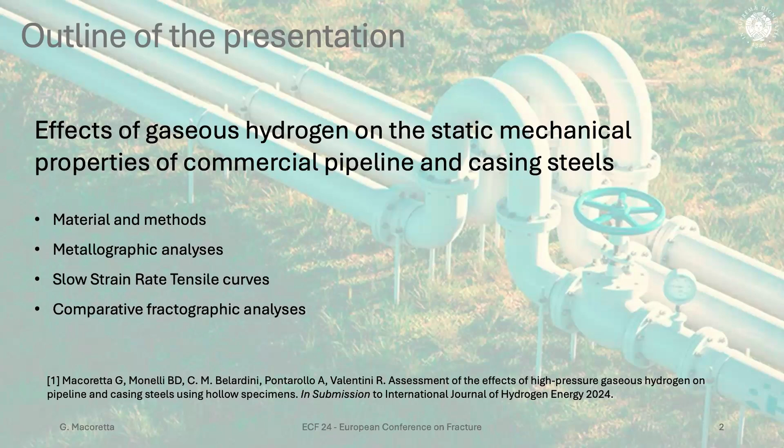We work with a hollow specimen, with an internal hole produced by drilling and, in this case, reaming, with a diameter of 3 millimeters. We introduce gaseous hydrogen into the specimen at a pressure of 10 megapascal, but we can reach even 20 megapascal. We use hydrogen with high purity, research grade purity.

The specimen presents a through hole because it's used for purging with hydrogen. So we have a pressure cycle before starting the test: at least 5 times we pressurize the specimen, release the pressure to at least 3 megapascal, and pressurize the specimen again, so we don't reach atmospheric pressure, to avoid the entrance of air. The specimen is pressurized at least 10 hours before testing because we want to be sure there are no gas leakages before the test, since the test itself is very slow.

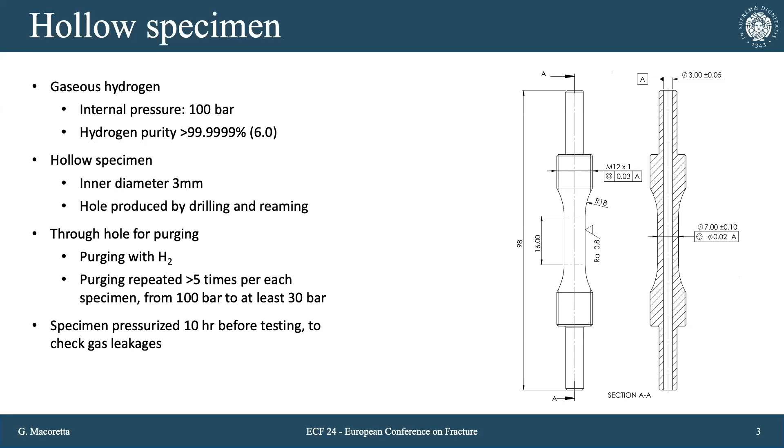This is the specimen. This slow strain rate tensile test is carried out in displacement control with a displacement of 0.1 micron per second, giving an effective average strain rate of 1 times 10 to the -6 per second. So it's a very slow tensile test.

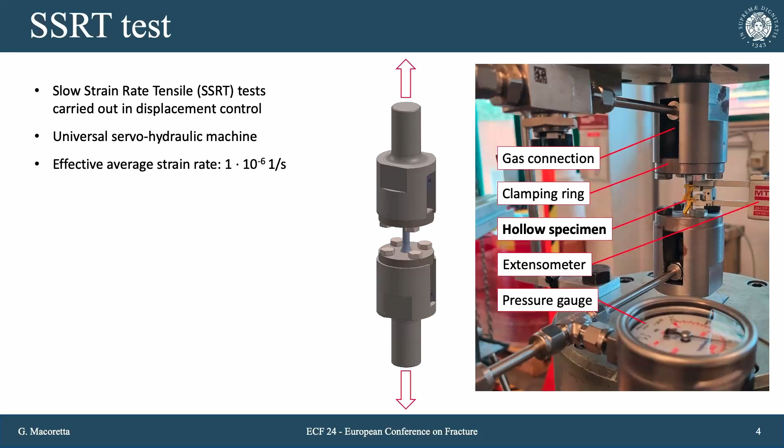Here you can see the test configuration. In the middle of the picture you can see the hollow specimen with an extensometer to monitor the deformation of the central portion of the specimen. You can see the clamping ring, a fixture that applies the load to the specimen, decoupling the load from the pressure fixture. We have the gas connection, and on it a pressure gauge to monitor the effective pressure in the specimen during the test.

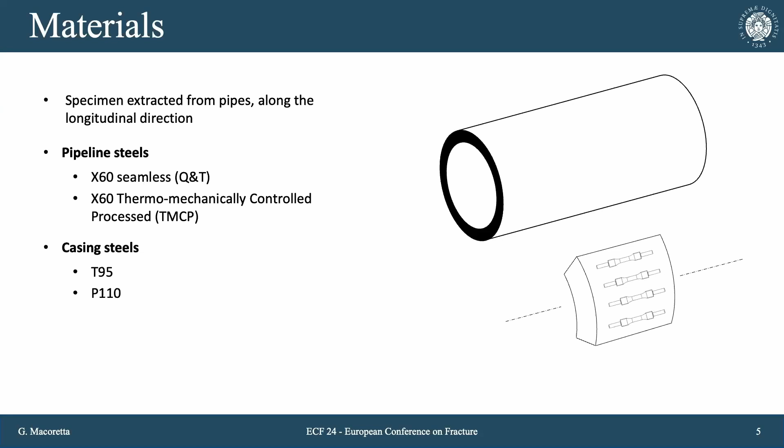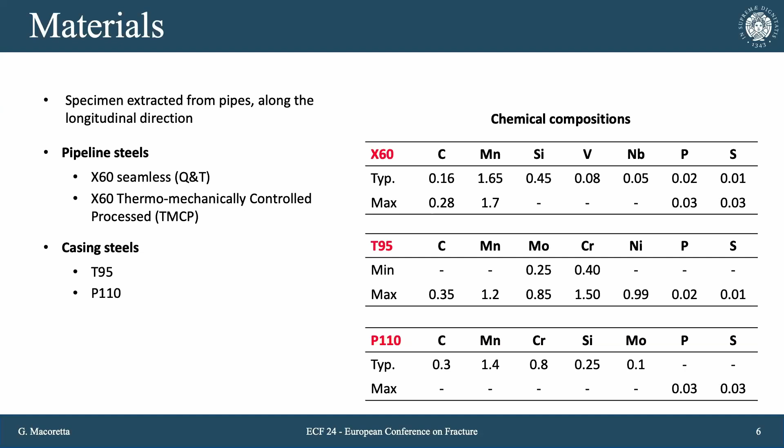Materials: we deal with X60 pipeline steel in the seamless configuration, so pipes produced via seamless process, and thermomechanically controlled processes materials, so a material produced by welding, by bending and welding sheet steel, and casing steel T95 and P110. All specimens were extracted from the pipe along the longitudinal direction, aligned with the pipeline longitudinal direction. About chemical composition, we are dealing with low carbon steels; in particular for the X60, but in all cases we have a carbon content lower than 0.3, more or less.

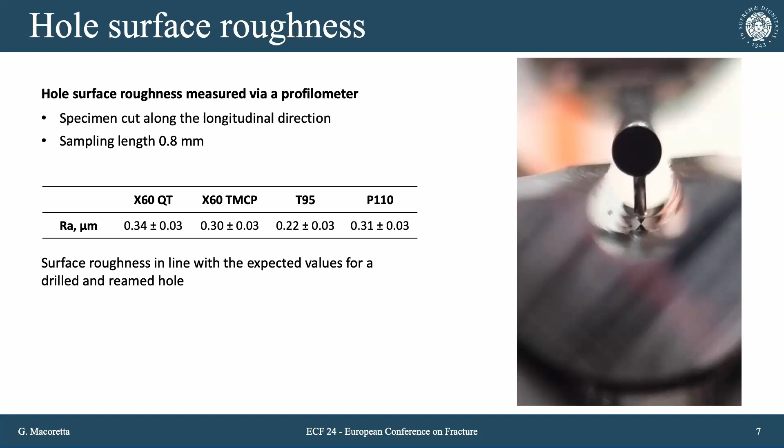Let's start with the assessment of the surface integrity of the hole. The hole, as I said before, was produced by drilling and reaming. We carried out surface roughness measurements on the internal hole of the specimen, and the results are in line with what we can expect from a reaming process. We have an average roughness value of 0.3 microns, in line with the reaming process.

If we also assess directly on the microstructure the effect of plastic deformation produced by the drilling and reaming process on the material, we can see that the drilling process affected a thickness of about 20 to 25 microns, both in case of the X60 TMCP or X60 quench and tempered material. You can see the difference is more evident in the first one, because of the more ferrite grains.

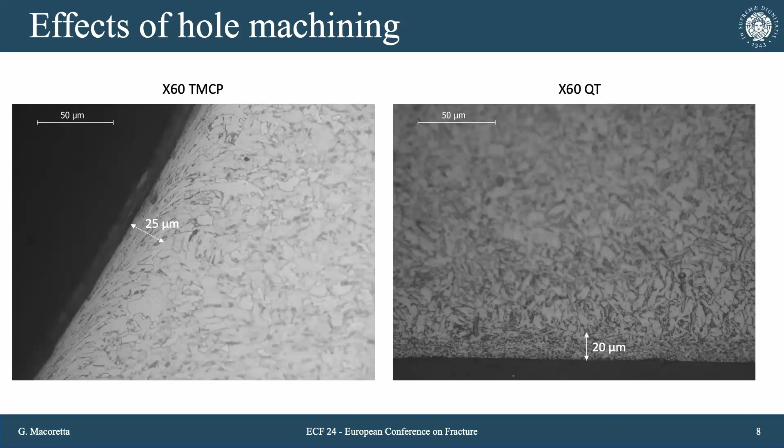Let's start with pipeline steels, and the microstructure of the material. Both materials are defect-free; it's a standard defect-free material used in the hydrogen, oil and gas industry.

If we look at the microstructure for the quench and tempered material, we can see the standard acicular ferrite typical from the quenching process of the low carbon steel, while in the TMCP material that was produced by submerged arc welding and then a homogenization process, we can see more ferrite grains with some pearlite islands.

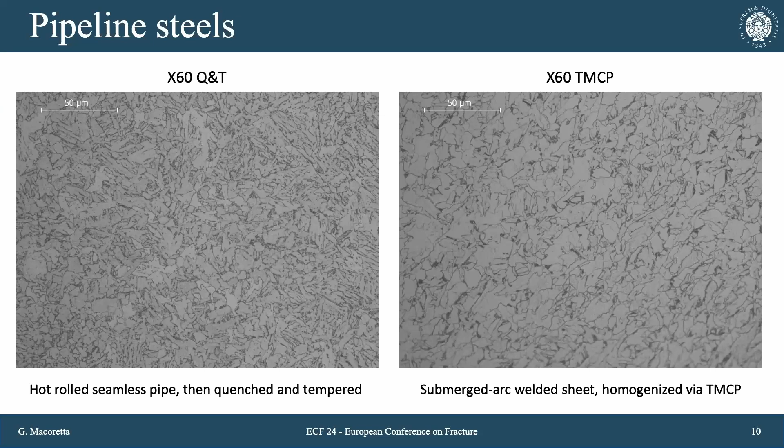If we look at the results of the slow strain rate tensile test, we can see the effect of hydrogen. Here we show the typical curves that we repeated at least 2 times per condition, and I show the typical curve observed, but the dispersion, or scatter, of the data is very low.

We can see that the effect of hydrogen, for both materials, affects only the plastic portion of the curve. The elastic part of the curve is not affected, and the effect becomes more evident after the necking phase. Until necking, the material is not affected by the hydrogen present inside the hole.

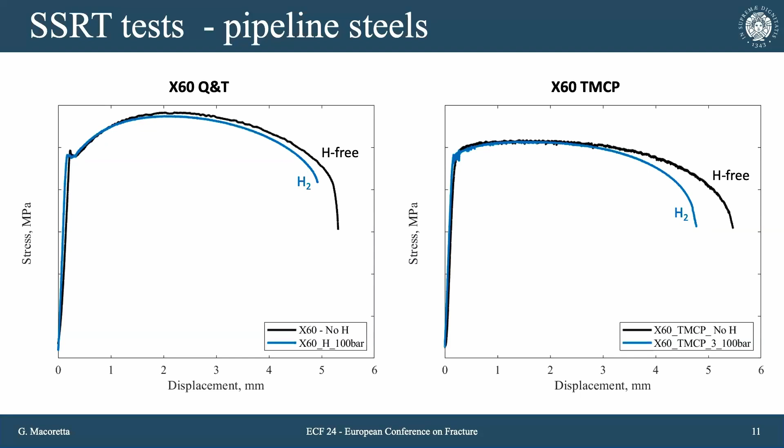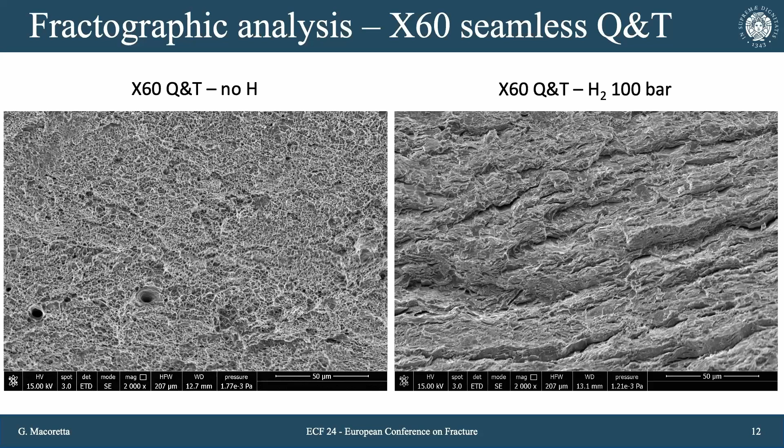If we go to the fracture surface to analyze the effect of hydrogen on the material, we can see that the material without hydrogen presents a standard ductile surface with standard microvoid coalescence, typical for a ductile material. While when we introduce hydrogen, at least in the first half of the specimen starting from the hole, we can see a transgranular fracture, so the comparison between the two surfaces clearly shows the effect of hydrogen on this material.

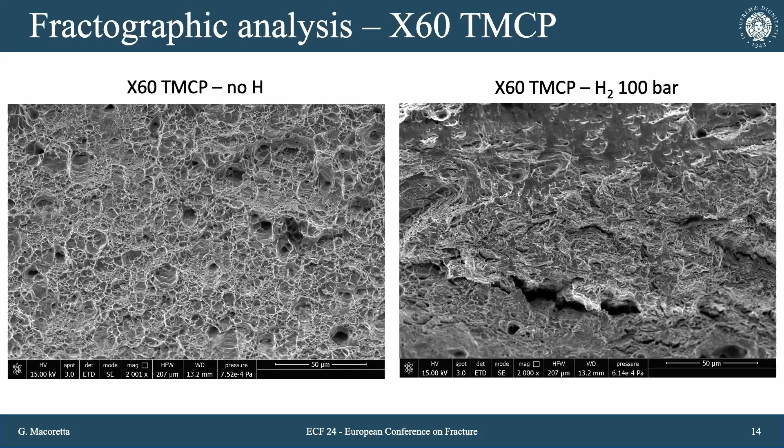The same happens with the TMCP material that has a bit more ductile surface in the hydrogen-free condition, and when we have hydrogen in the material, we observe transgranular fracture. We can observe also some tears, and in proximity of tears, also some pseudo fisheye features that hint that there is some hydrogen accumulation in those places.

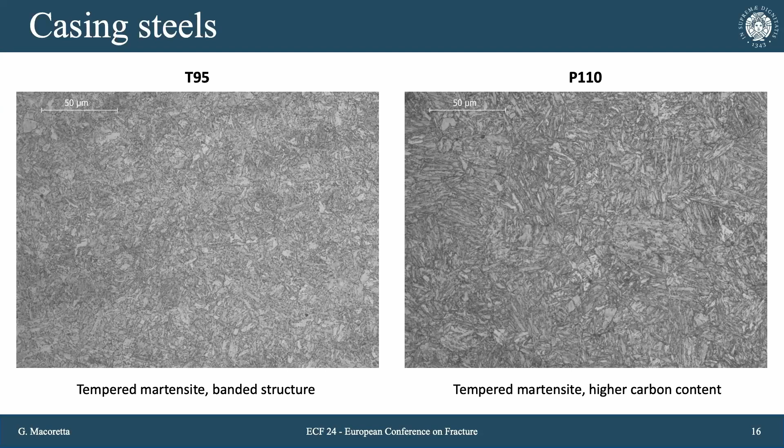So more deeper embrittlement effect of hydrogen, a localized embrittlement effect. If you go to see what happened with casing steel, T95 and P110, if we observe the microstructure, we observe that also in this case we dealt with defect-free material with a standard tempered martensite microstructure that changes a bit between the two materials depending on the carbon content of the two materials, and hydrogen, and a bit of the treatment that the materials were subjected to.

If we go to see the result of the slow rate tensile test, we see that also in this case it's even more evident because we have a reduced scatter of the data. The effect of hydrogen takes place only in the plastic portion of the curve. The elastic part of the curve is identical. Also the yield phase, even in a material like the T95 that has a discontinuous yielding phenomenon.

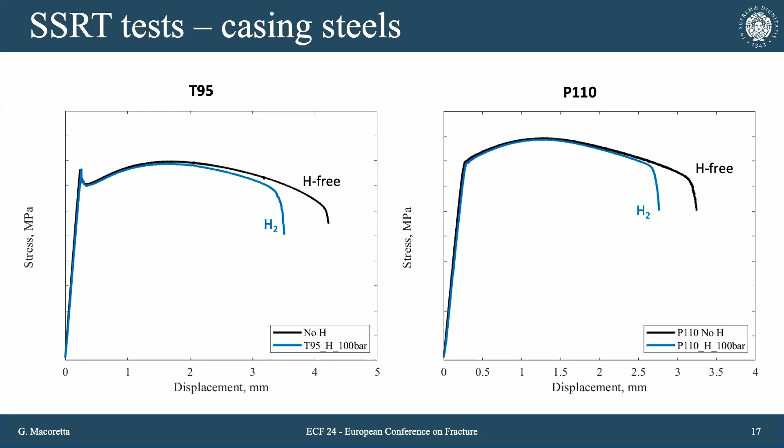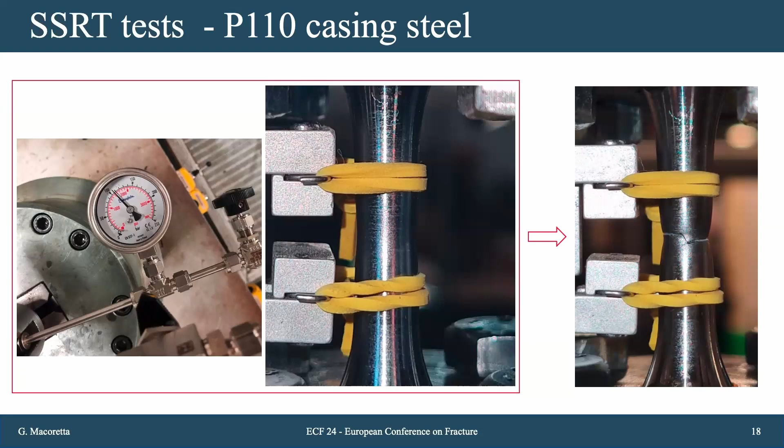The two curves start to differ mostly after the necking, just a bit before necking for T95, for P110 only after necking. And so the effect of hydrogen also in this material is a ductility reduction without a reduction in the material strength. If we just see, even when we have necking, we still keep the pressure inside the specimen. So we have a pressure drop only when we reach failure. Until failure, we have a continuous section that still can keep the internal pressure.

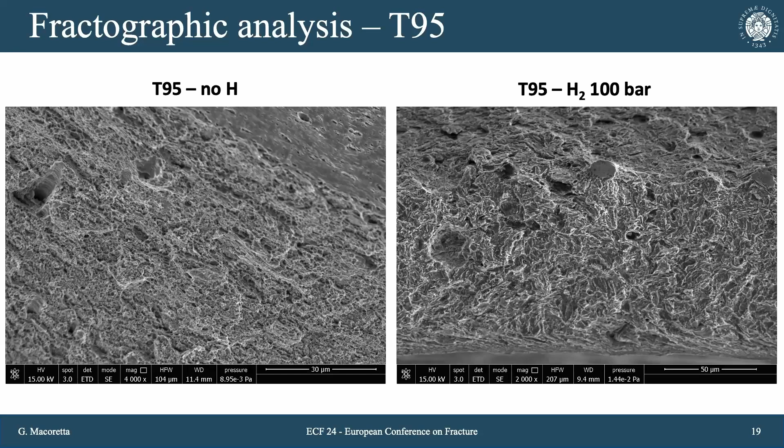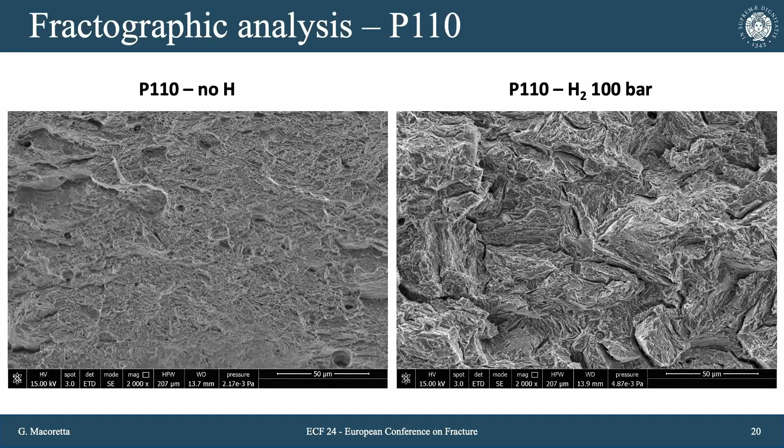On the P110, the situation is even more evident. We pass from a surface with ductility features, so even in this case microvoid coalescence and so on, to a surface with a strong transgranular fracture and even some traces of intergranular fracture. This is a high-strength material compared to the previous one, and so the effects of hydrogen are still more evident compared to what happened in the other materials.

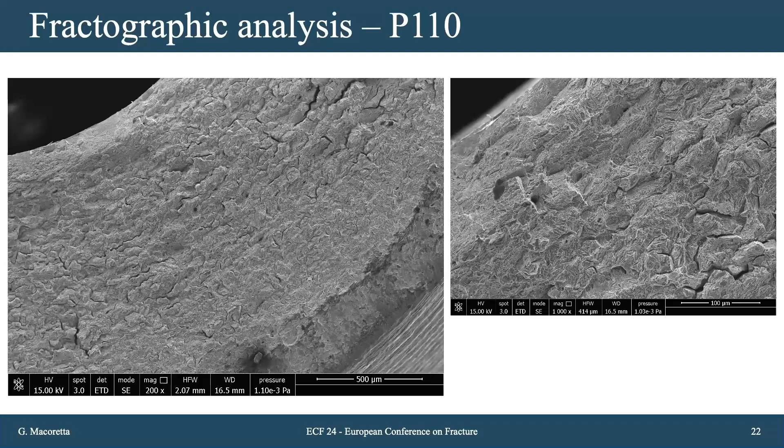This is the more conservative region of the specimen where the unaffected region is wider. You can see here in another portion of the same specimen how the hydrogen affected region reached the outer part of the specimen, and then we have only the final shear lip with some smearing traces due to the final fracture. And so, just to conclude, we observed that the hollow specimen configuration proved to be suitable for the characterization of the effect of gaseous hydrogen on pipeline and casing steels.

The effect affected mostly the plastic region of the materials. So hydrogen effects take place when plastic strain is present, dislocation motion is present, and it's fundamental for this kind of materials. The effect of hydrogen intake is more or less a ductility reduction. If we want to see some numbers, more or less we have a reduction of 7 to 15% when we deal with pipeline steels. TMCP material is something that is more scattered with some defect, and so effect is greater.

When we go to see what happens in terms of casing steel, which has high strength material compared to the previous one, and so as you'd expect, it's also evident in the literature, the effects of hydrogen are even greater, but we still deal with a reduction in terms of the elongation at fracture of less than 20%. Fractographic examination showed us a wide embrittled region, so the effects of gaseous hydrogen are strongly evident. And the embrittlement region is evident because we have a passing from microvoid coalescence to transgranular fracture for this kind of material.